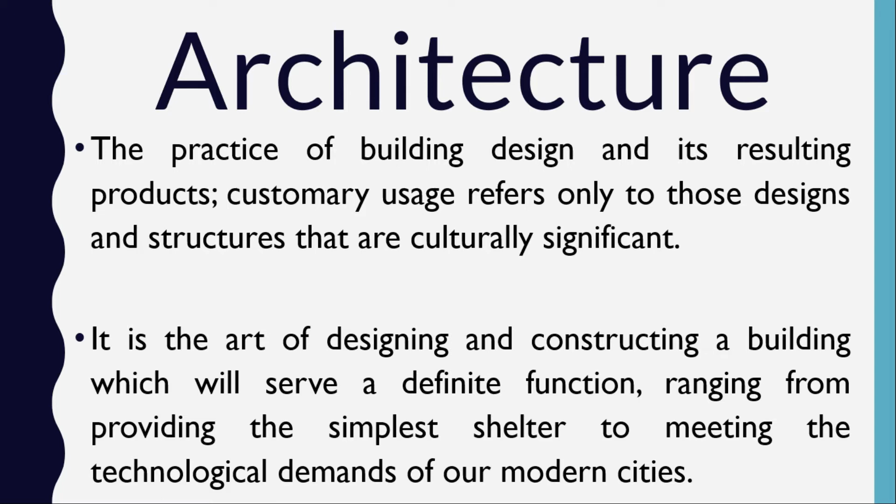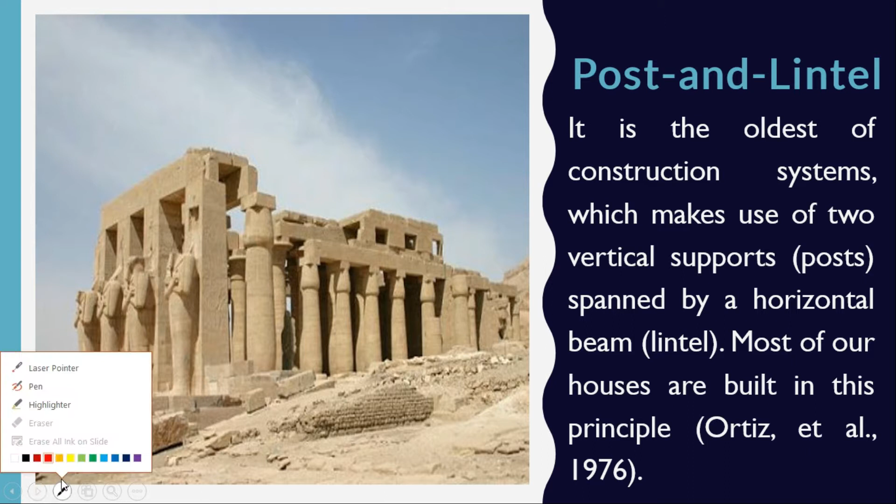Okay, so here are the construction principles of architecture. The first one is the post and lintel. Post and lintel is the oldest of construction systems of architecture, which makes use of two vertical supports, nakita niyo dyan yung posts, spanned by a horizontal beam. So here is the vertical support. Have you seen that? Ito yung mga vertical support natin. And then we have the horizontal beam. The horizontal beams are here.

Horizontal beam. Now, most of our houses are built on this principle, right? Meron tayong poste and then meron tayong beam. It is called post, and then we have the lintel. Lintel is the beam. Again, lintel is considered as the horizontal beam.

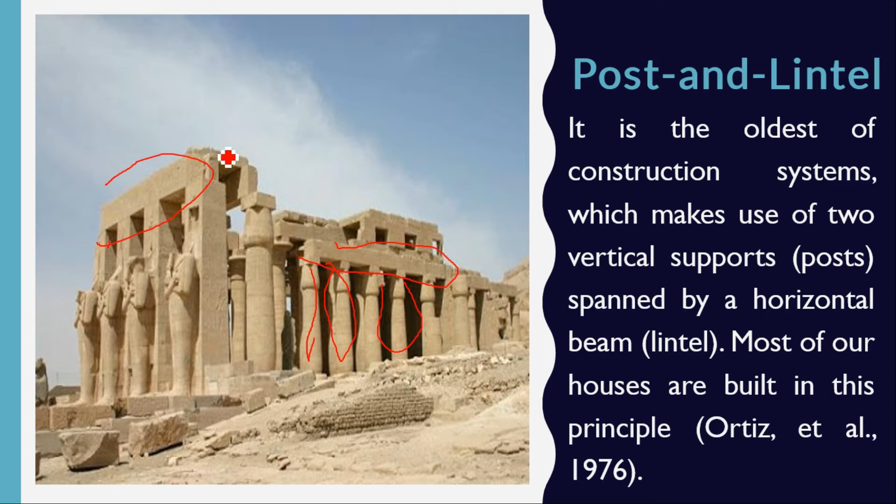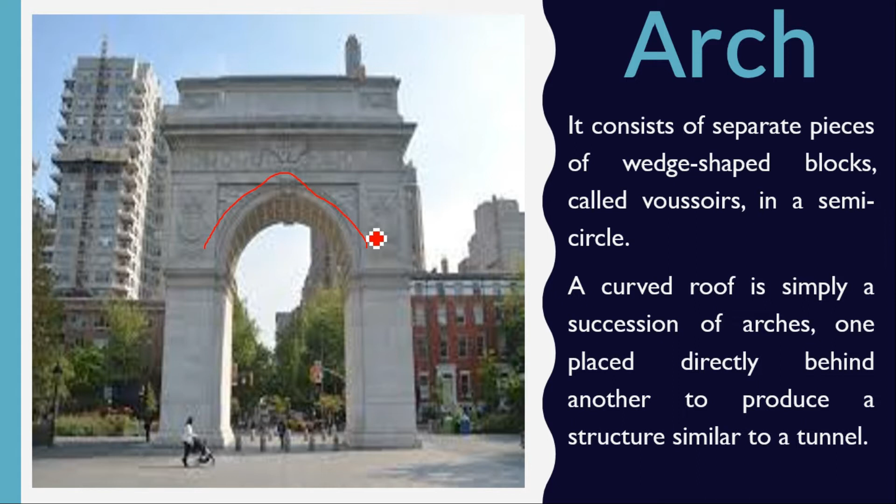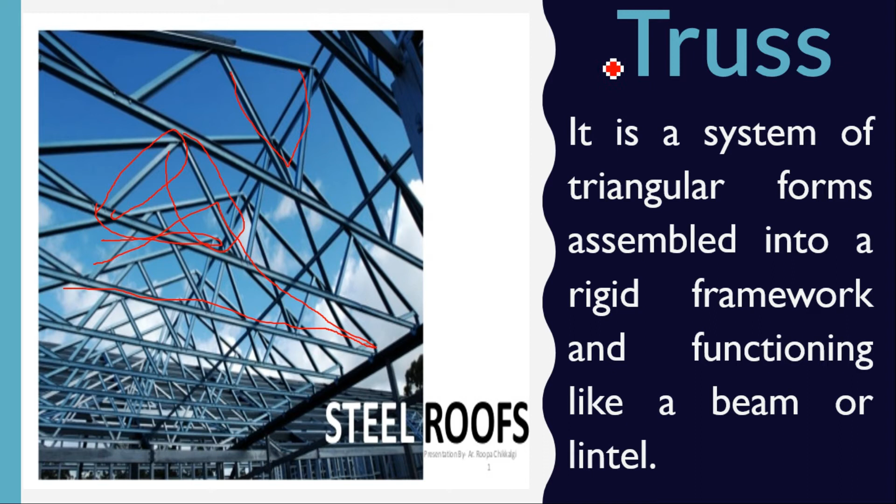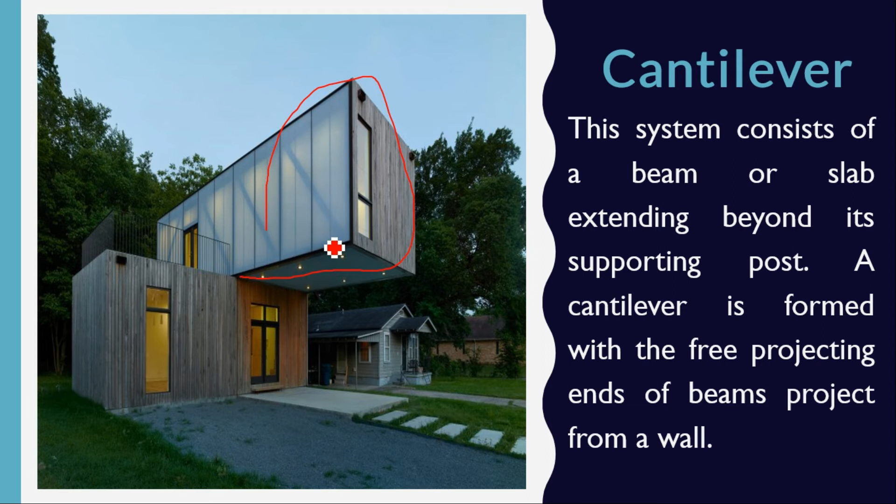The next one is cantilever. This system consists of a beam or slab extending beyond its supporting post. So here, ito yung cantilever. A cantilever is formed with the free projecting ends. See that? It is free projecting ends of beams projecting from a wall. So yan yung cantilever.

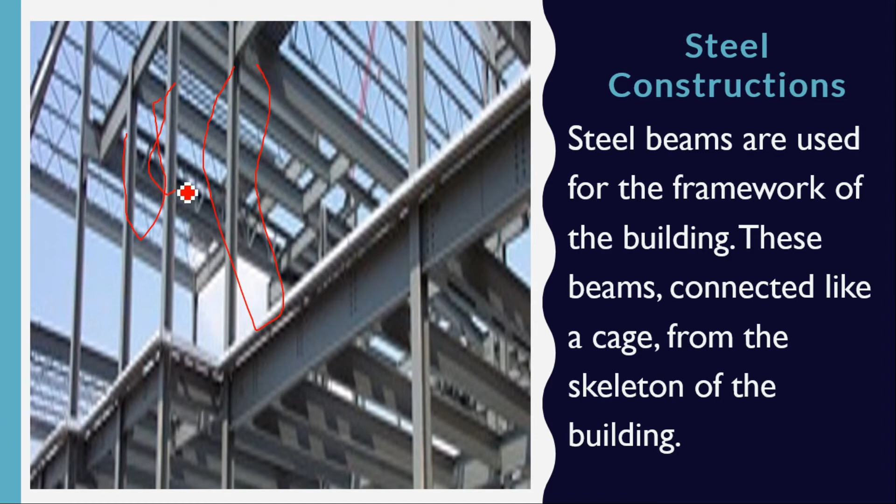The next one is the steel construction. Steel beams are used for the framework of the building. These beams are connected like a cage to form the skeleton of the building. So yan yung steel construction or the steel beams. Here are the steel beams. These beams are made of steel.

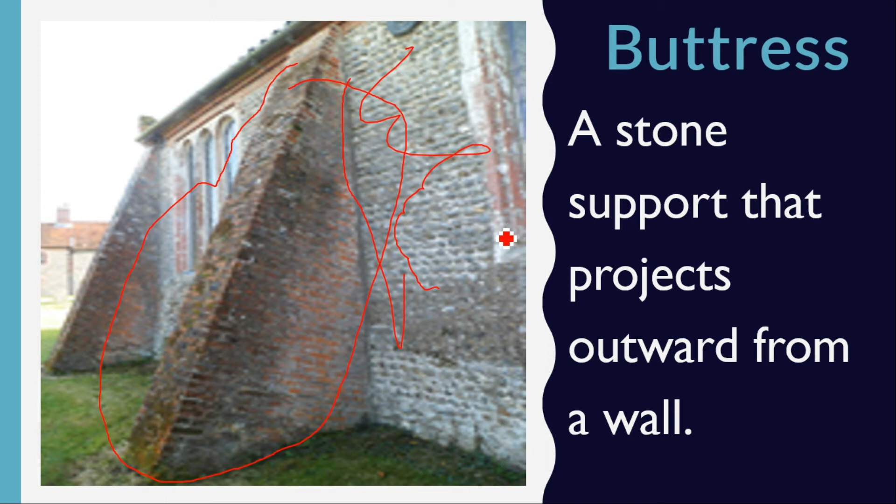The other building parts of architecture are here. Ito yung mga building parts. Some are very unique. Yung iba dito ay bago sa mga mata nyo, but it was used before. So we have the buttress. The buttress is a stone support that projects outward from a wall. Ito yung wall ng isang shelter or bahay. And this is what we call buttress. It supports the wall, and it is made of stone.

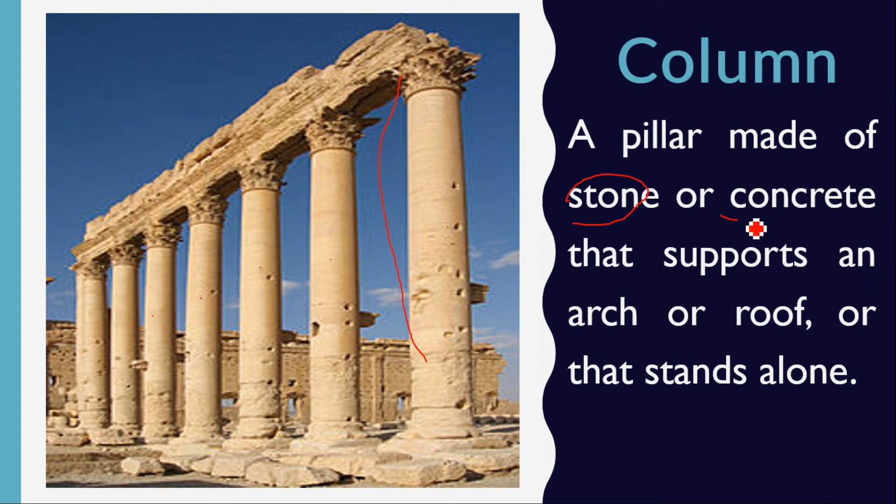Next is the column. It is a pillar made of stone or concrete that supports an arch or roof or that stands alone. So ito yung column. It is a pillar. Ilang pillars ba meron ang image na to? We have 1, 2, 3, 4, 5, 6, 7. Seven pillars or seven columns made of stone or concrete. Concrete is cement.

Next one is the flying buttress. Again, a buttress is something that supports the wall, right? But in this case, it is a flying buttress. Why is it a flying buttress? Because makikita na this buttress forms an arch connecting a main wall with another structure. So ito yung flying buttress natin. It is not just supporting but it also forms an arch. Meron siyang arch na na-form.

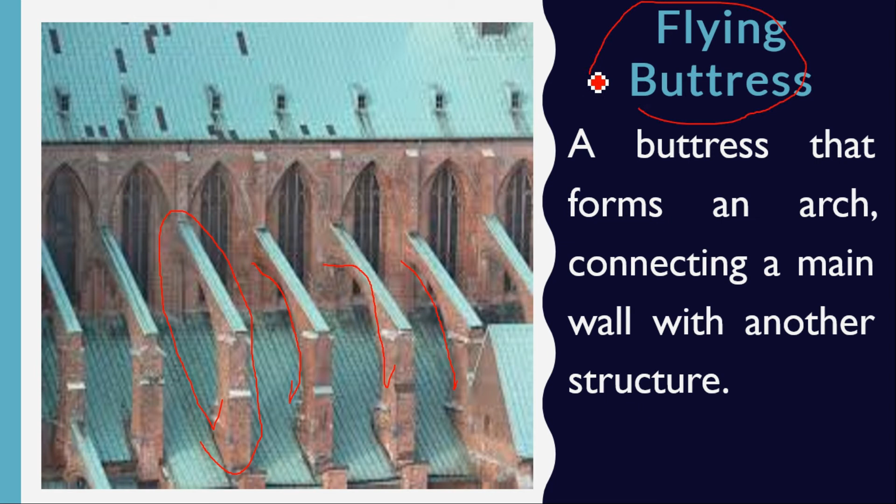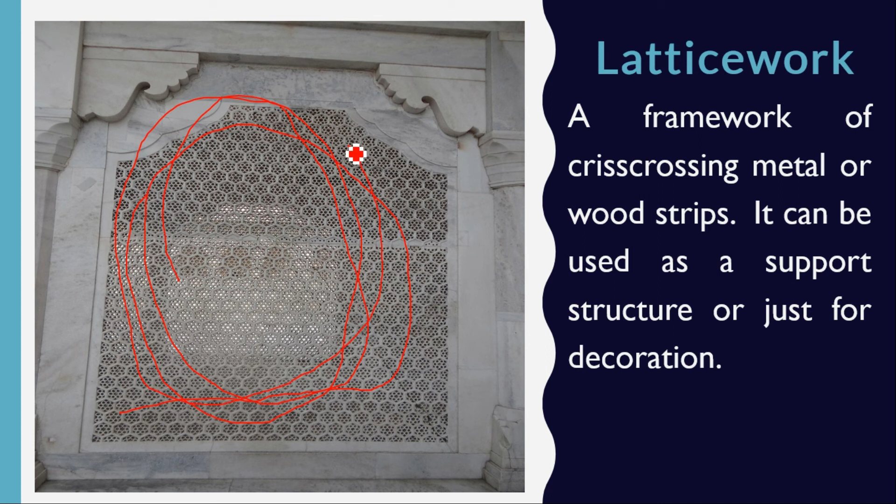The next one is the latticework. It is a framework of crisscrossing metal, tulad nito, or wood strips. It can be used as a support structure or just for decoration. Marami to sa mga simbahan. Makikita natin yung mga latticework.

The next one is the spire. A spire is a tower shaped like a cone that was developed in Europe and is usually the top of a place of worship. Yung spire natin dyan is eto. Yan yung spire. It's shaped like a cone.

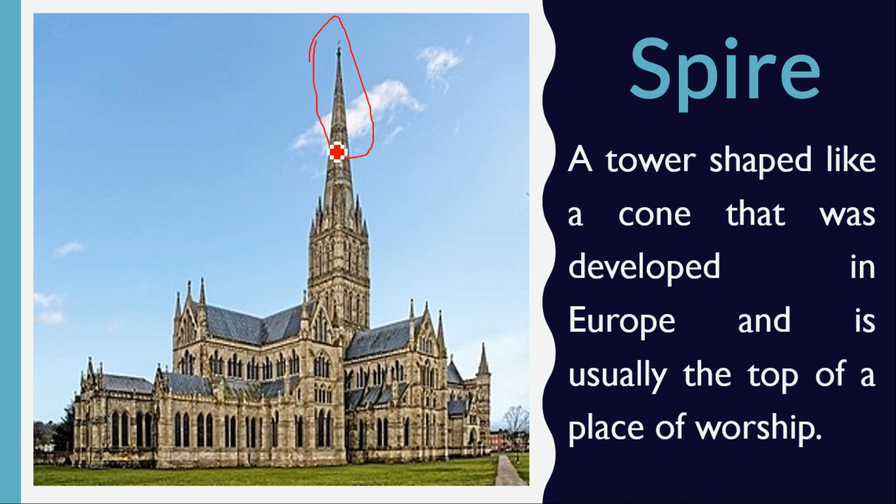So that would be all in architecture. Let's not complicate it, because kinuha lang natin yung mga importanteng points or topics or subtopics sa architecture.